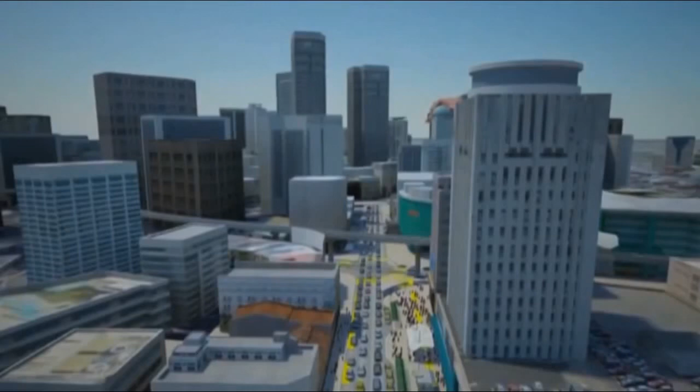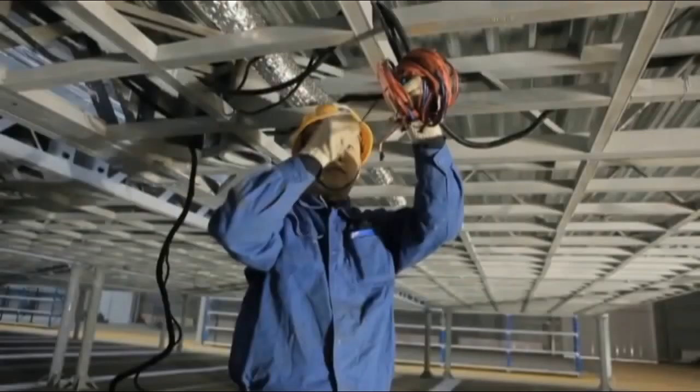Quantity surveying is a field related to estimate, plan and control costs in a construction project and ensure that building materials and labor are used in the most efficient way.

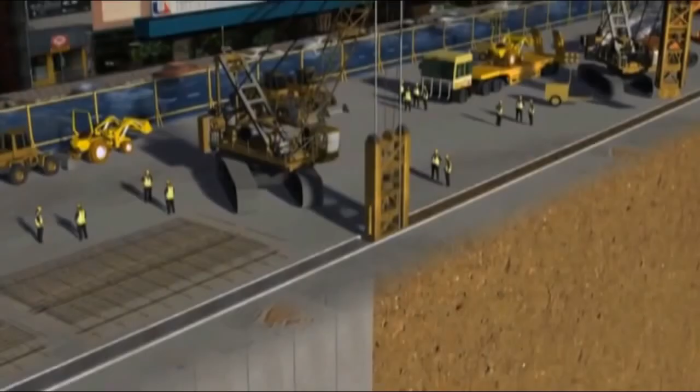Quantity surveying prepares schedules of quantities of the various project elements. In many places in the world, a schedule of quantities is prepared for most types of construction contracts, including lump sum and unit price.

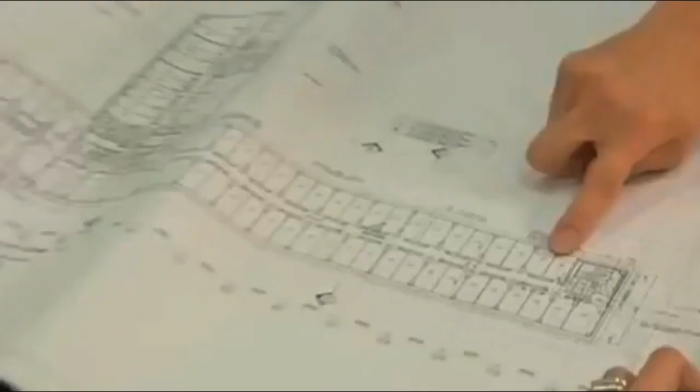Quantity surveys are conducted at various points during the planning and design phase, not just during construction document development. The contract documents of materials quantities vary in different parts of the world.

For all unit price, measure and value contracts, these quantities must be provided because the tenders are based on a common set of quantities.

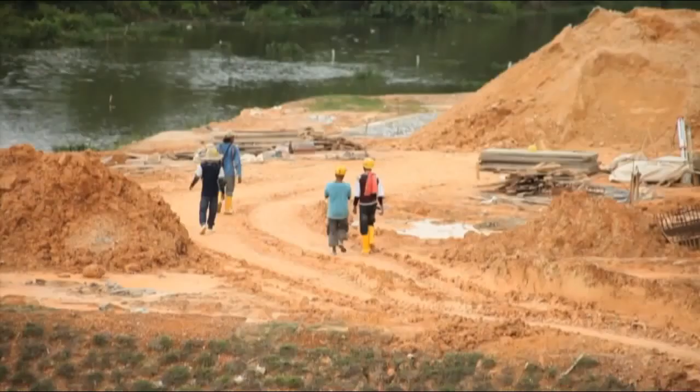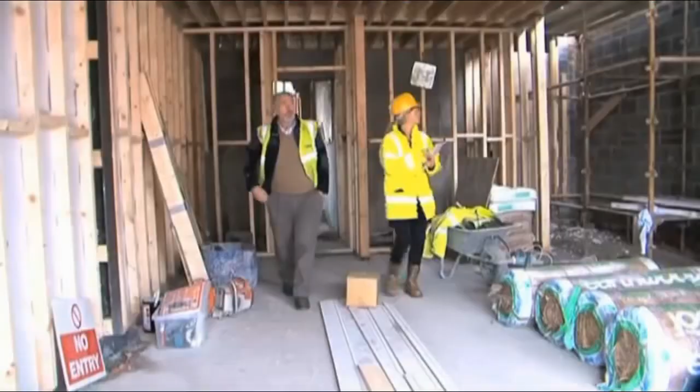All construction projects of any size, type or complexity follow a procedure beginning with a preliminary planning and feasibility study, and leading on through schematic design, design development and construction contract document preparation.

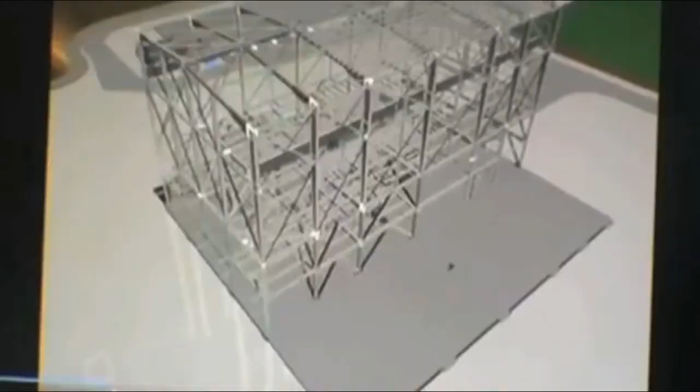It will be useful if quantity surveying should have their own representative in every construction company who plan the flow of materials throughout the project in order to cut waste and increase the value of work activities inside production.

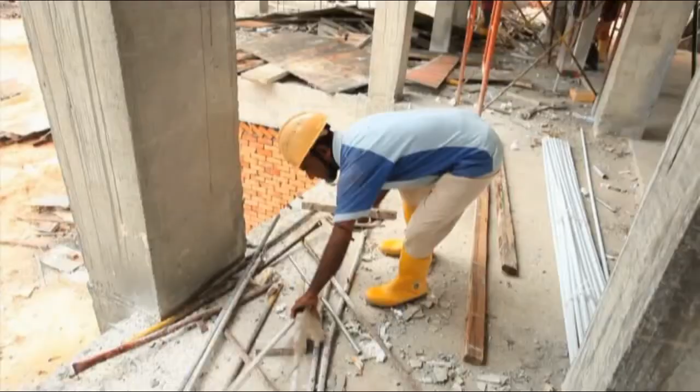Quantity surveyor is one of the important roles in the construction industry. They are responsible to calculate any variation and extra work on site as per requirements of the project.

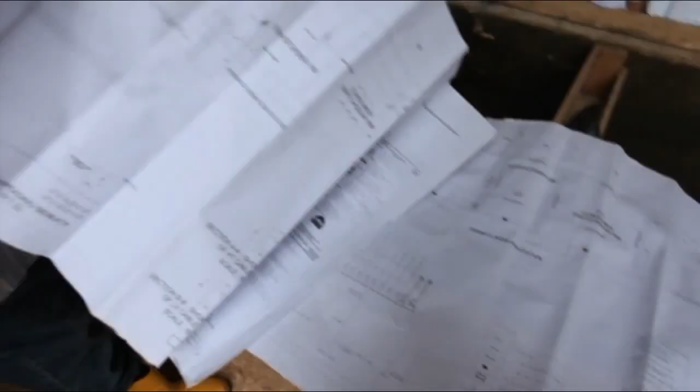The contracts and costs on the construction project, including the beginning startup work to the final figures to complete the project, is what the quantity surveyor job consists of.

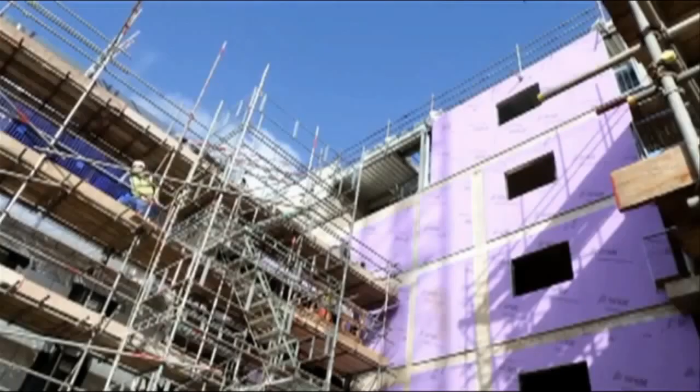The three major responsibilities for a quantity surveyor are to produce cost estimates, enabling budgetary and finance control, to provide advice concerning contract strategy and taxation, and to prepare contract documents for procurement of consultants and contractors.

Quantity surveying is a career that requires formal education, specialized training and experience. It is the scope of work related to estimate, plan and control costs in a construction project.

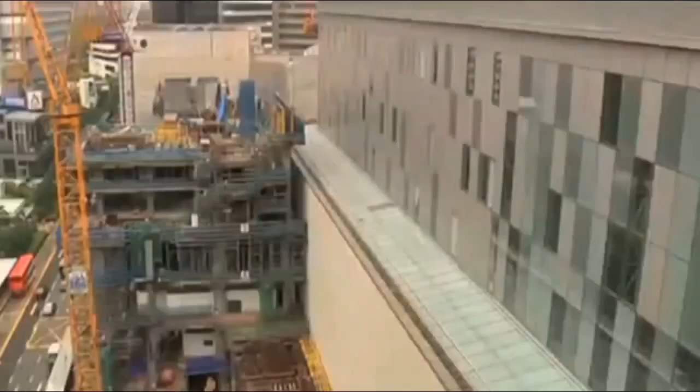Quantity surveyor ensures that building materials and labor are used in the most efficient way. The knowledge and expertise gained by quantity surveyors in the organization of construction projects put them in an ideal situation to operate highly effectively as managers of construction projects.

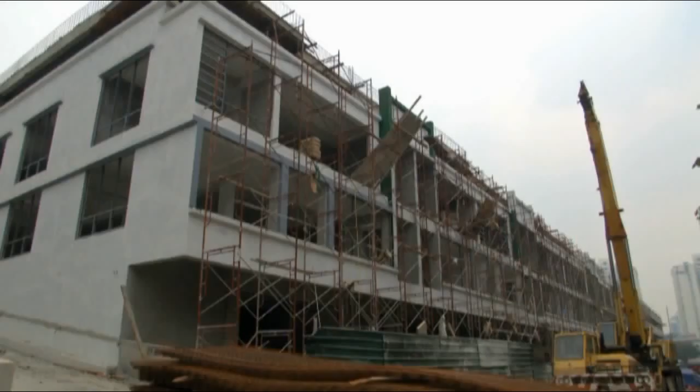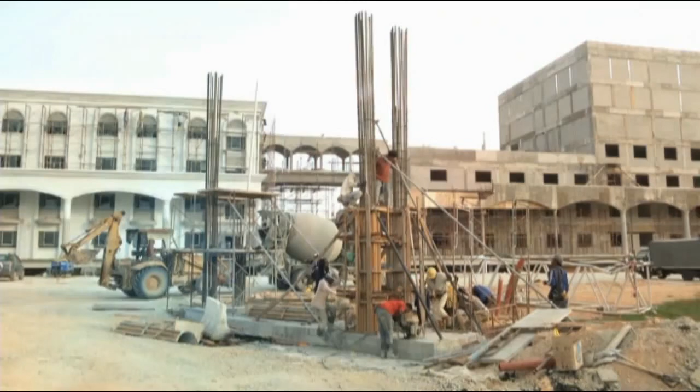The construction industry is now growing in Malaysia. With the population growth rate in the country, property development will also develop by leaps and bounds.

Without the important role played by quantity surveying workforce, the construction industry throughout the world faces structural considerations in controlling the cost and the period of completion of the project.

They are specialized and skillful in calculation of development materials that are always recognized and needed at present and in the future.